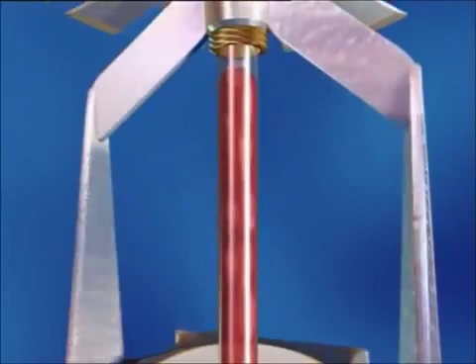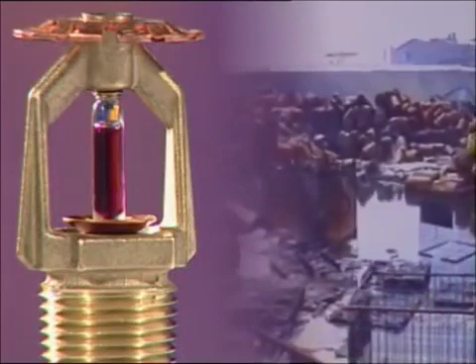Fire sprinkler systems were invented over 120 years ago. Since then, several hundred million sprinkler heads have been installed throughout the world. In that time, they've effectively protected thousands of buildings, helped to prevent the financial collapse of numerous businesses, saved countless lives, prevented innumerable burn injuries, and protected the environment from catastrophic fire-related pollution. They're universally acknowledged as the most effective first line of attack against fire.

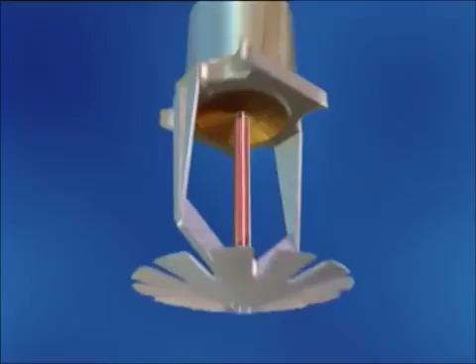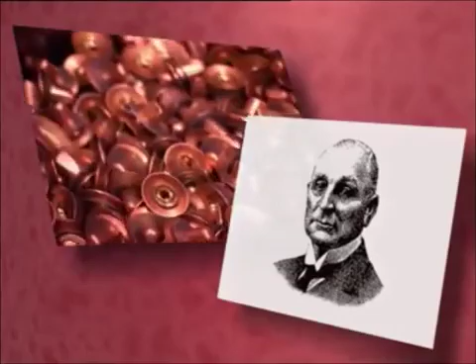The world's first rules for the design and installation of automatic fire sprinklers were written in the UK by John Wormald in 1885. Fire sprinkler systems in the UK are generally designed in accordance with British Standard 5306 Part 2 and, in some instances, Loss Prevention Council (LPC) rules for automatic sprinklers. American rules may sometimes be used, being Factory Mutual or National Fire Protection Association.

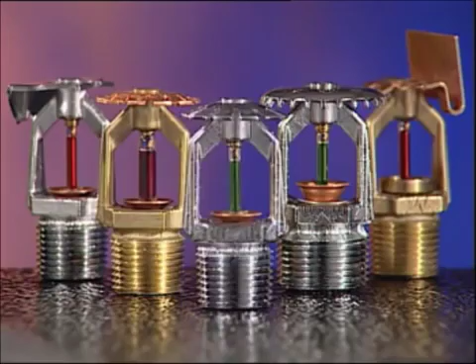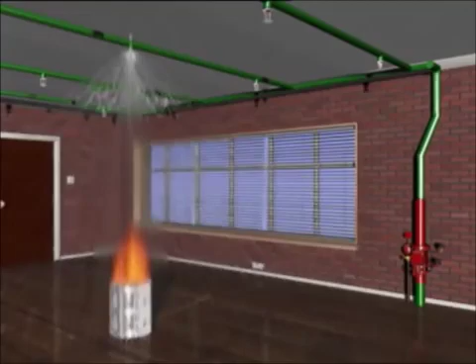Sprinklers are designed to cope with the fire risk presented by each individual building and may also be specifically configured to save lives. Water still remains the most effective firefighting medium available. Sprinklers will deliver water right into the heart of a fire during its early stages through a specially designed sprinkler head. Sprinkler heads are unique. They automatically detect a fire, discharge water right into the seat of the blaze, and operate a local alarm. They can also operate a remote alarm to alert the fire brigade or other emergency centre.

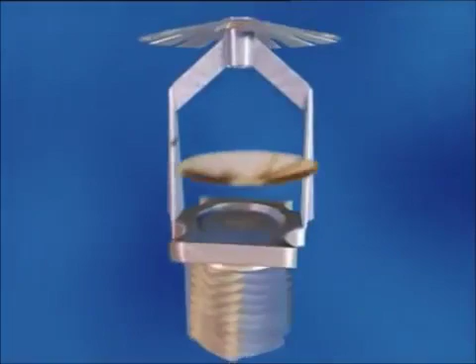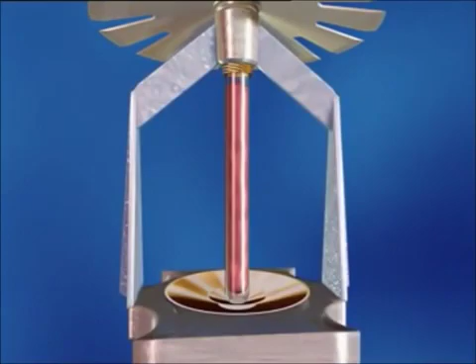A typical sprinkler head comprises a threaded body to connect to pipework, with a valve seal to hold back the water. The valve seal is retained by a glass bulb which contains a liquid that has a high coefficient of expansion. A small measured quantity of vapor remains trapped when the bulb is hermetically sealed. When the liquid expands under the influence of heat from a fire, pressure in the bulb rises until the vapor is compressed. Further increases in temperature cause a rapid build-up of pressure sufficient to shatter the bulb, releasing the valve seal and allowing the water to flow onto a water distribution deflector. This results in an even distribution of water droplets in a predetermined pattern over the fire.

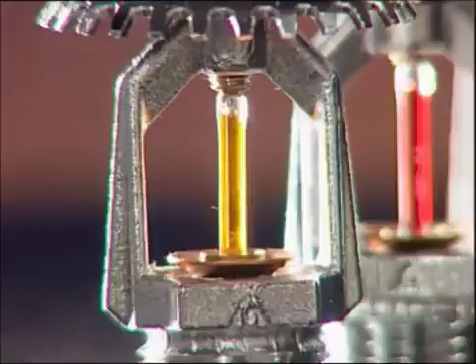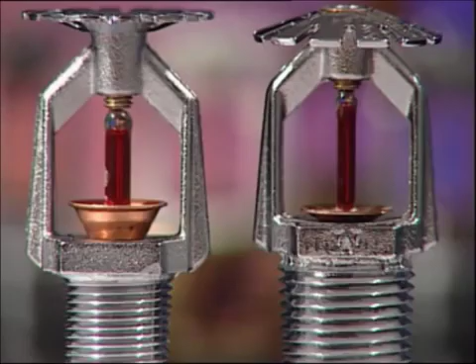Sprinkler heads are available in a variety of operating temperatures, which are identified by the color of the bulb. The specifier has a vast array of sprinkler heads available to him. Each type of head is designed to cope with different fire risks, different operating temperatures, and different operational requirements. The British Standard defines fire risks as light hazard, ordinary hazard, or extra high hazard. Generally, as the hazard increases, so does the water discharge or design density.

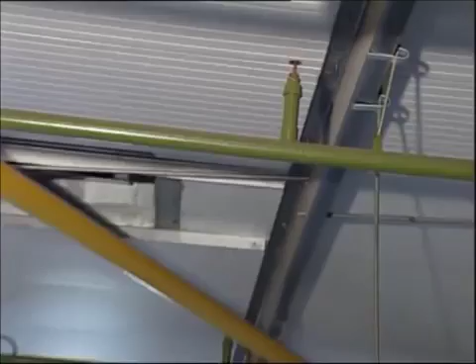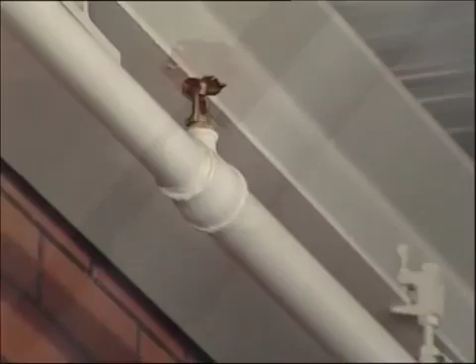Conventional sprinklers can be mounted in either the upright or pendant position, with a deflector designed to spray a proportion of the water discharged onto the surface of the ceiling. Spray sprinklers in upright or pendant positions are used for applications where all the water needs to be discharged downwards. Sidewall sprinklers are primarily used to keep ceilings clear of pipework for aesthetic reasons or to avoid having to disturb existing ceilings when installing. Each sprinkler protects up to 17 square meters in light hazard fire risks and 9 square meters in ordinary hazard fire risks.

Sidewall sprinklers with extended coverage are specifically designed to give an extended coverage of water distribution, with one sprinkler able to protect an area of up to 21 square meters. This type of sprinkler must have a quick response bulb. In a fire, few deaths result from direct contact with flames. The greatest threat comes from inhalation of the products of combustion, such as carbon monoxide, hydrogen cyanide, hydrogen chloride, other toxic gases, and the associated heat.

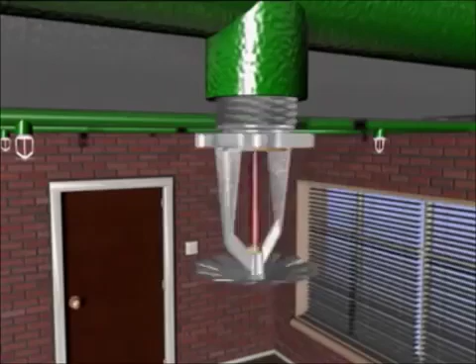The reaction time of quick response sprinklers minimizes the life-threatening levels of toxic gases and temperatures. In many environments, there are people who cannot escape without assistance, such as in hospitals or homes for the elderly. Quick response sprinklers provide valuable time for those in charge to assist their escape. A sprinkler head is connected to a water supply via a network of pipes fed throughout the building. The area protected by each sprinkler head can vary from 9 square meters to 21 square meters depending on the fire risk. The pipework is hydraulically designed to ensure the correct flow and pressure of water is maintained at each sprinkler head.

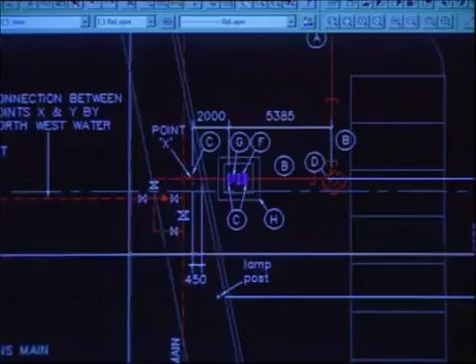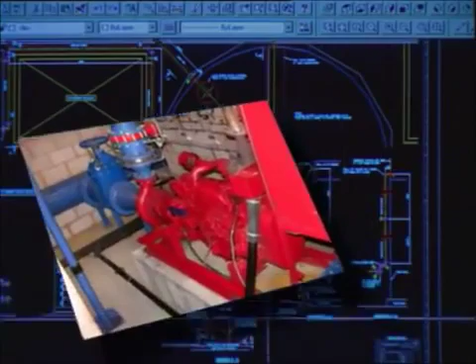The water supply to the system can be fed from the town main for light to medium fire risks, such as residential, offices, hotels, and light manufacturing and commercial occupancies. For high fire risk areas, such as heavy manufacturing and warehouse storage, a pumped supply from a water storage tank or reservoir is normally necessary. The design requirements are specified in the British Standard BS 5306 Part 2 and LPC, FM or NFPA design rules.

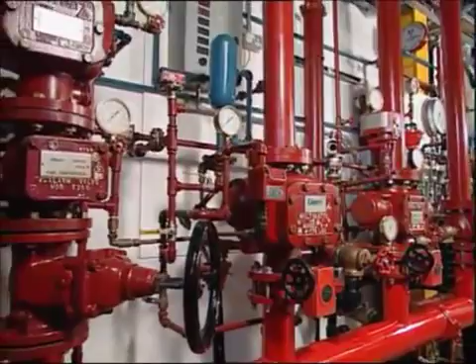A control and alarm valve automatically delivers the flow of water to the sprinkler heads. There are generally 5 types of sprinkler system that all require different valve arrangements. A wet system is where the pipework is permanently charged with water and used to protect premises where temperatures are unlikely to fall below freezing point.

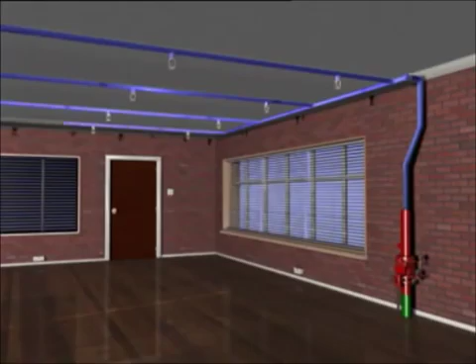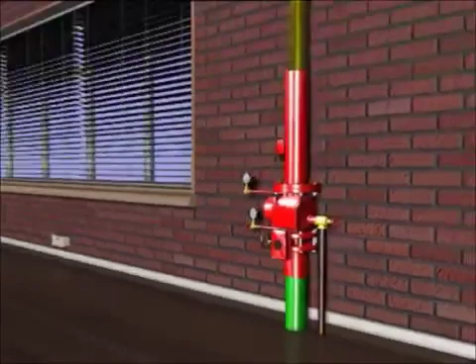Where the ambient temperature may fall or be below freezing point, the presence of static water in the sprinkler pipes is clearly undesirable. In this situation, a dry system can be installed in which the pipework is charged with compressed air. When a sprinkler operates, the compressed air is released and the control valve opens, allowing water to flow into the pipework and to discharge from the operated sprinkler heads.

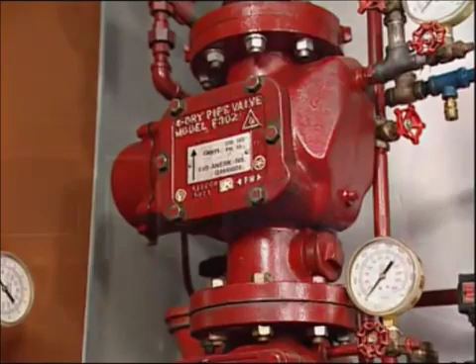An alternate wet and dry system, as the name implies, allows the system pipework to be alternately charged with water in summer and with air in winter, when there is a risk that the ambient room temperature can fall below freezing.

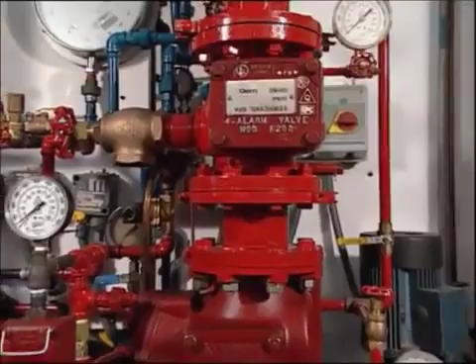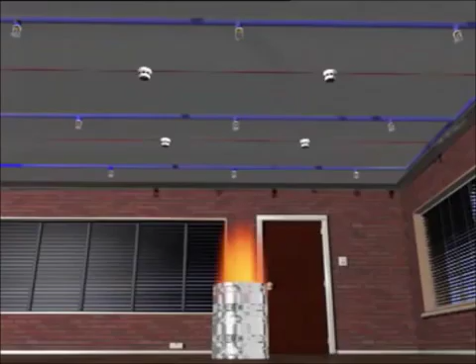Pre-action systems are comprised of a standard sprinkler system and an independent electrical system of heat or smoke detectors installed in the same areas as the sprinklers. On receipt of a signal from 2 or more detectors, the main control panel automatically opens the control valve, allowing water to flow into the sprinkler pipework. Water is only discharged when the individual sprinkler heads reach their operating temperature.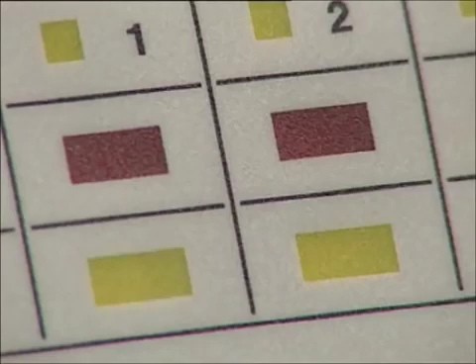Any physical damage to a sprinkler in a non-fire situation will not result in water discharge, but will cause both visual and audible alarms to be raised at the main control panel only.

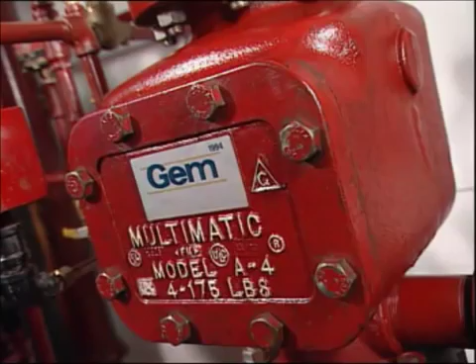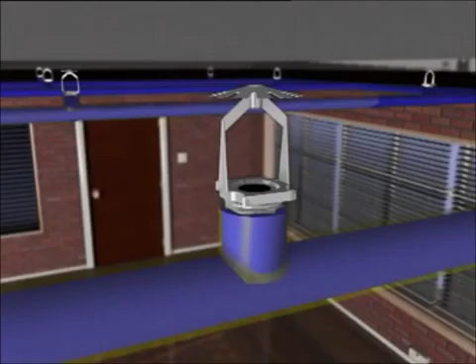A deluge system, unlike any other typical sprinkler system, is designed specifically for high-hazard applications with fast fire growth potential. The deluge valve is actuated by a separate detection system responding to a fire. This brings a large number of open sprinklers into action simultaneously throughout the protected area.

The successful performance of sprinkler systems has been detailed in records from across the world, paying testament to their outstanding reliability and effectiveness. In Australia and New Zealand, where it's a requirement that all fires must be reported, records reveal that over a 100-year period, sprinklers successfully controlled 99.5% of fires in sprinklered premises. Statistics collated in Europe over the last decade are remarkably similar, showing that in fully sprinklered premises, 99% of all fires have been controlled by the sprinkler system.

The reason sprinklers are so effective is because they attack the seat of the fire before it has time to grow and spread. There's no excessive use of water. In Germany, for example, 86% of fires in sprinklered locations have been controlled by 5 or fewer heads. In the UK, it's reported that of the fires in sprinkler-protected buildings over a 10-year period, almost half were controlled by 1 or 2 sprinkler heads only.

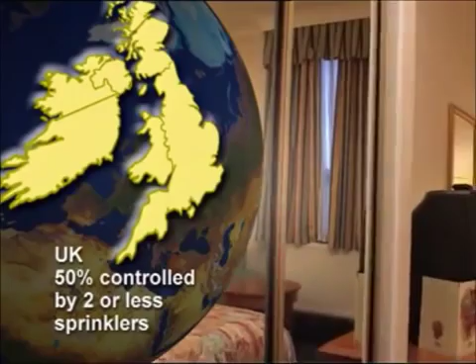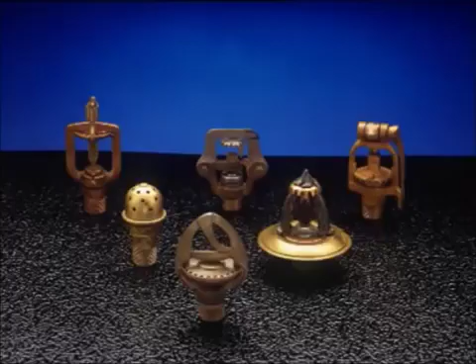Fire brigades, local government authorities and politicians alike have all seized upon these statistics. This has generated numerous campaigns for sprinklers to be installed in applications that could only ever have been dreamt about when sprinklers were first commercially launched over 120 years ago. That's because sprinklers are unique. They not only detect a fire and raise an alarm, they operate to control it and in many cases extinguish the fire before the arrival of the fire brigade. Only the sprinkler heads closest to the fire operate.

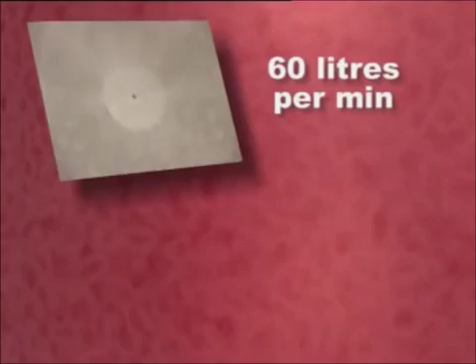Water is discharged by a sprinkler directly onto a fire at a rate of a minimum of 60 litres per minute, in comparison with an unsprinklered building where the fire brigade using only 1 fire hose could discharge 500 litres per minute. The fire will also be much larger as it will have grown for at least 10 minutes before the fire brigade arrive, so the likelihood is that more than one hose would be used.

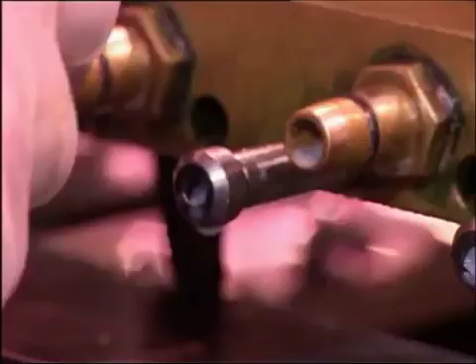Worldwide research shows that of the 40 million sprinklers installed every year, only 2 may operate accidentally. This is because every head is individually tested before leaving the manufacturer. Sprinklers are economical to install. For example, in the case of office blocks and hotels, the sprinkler system would cost about the same to install as a quality carpet for the equivalent area. Sprinkler systems will have a lifespan of at least 25 years, probably 50 years. Some systems are still in use today that are over 120 years old.

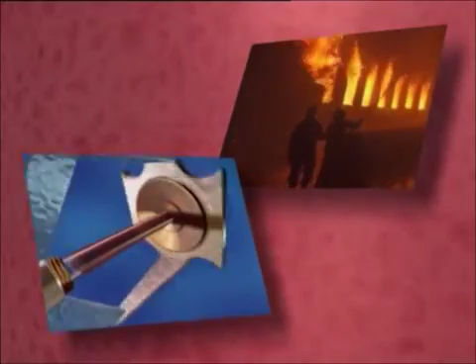The threat from fire will never change. It will always be with us, endangering life, property, and the environment we live in. Fire sprinklers will protect us and future generations. Fire sprinklers. Protection for life.